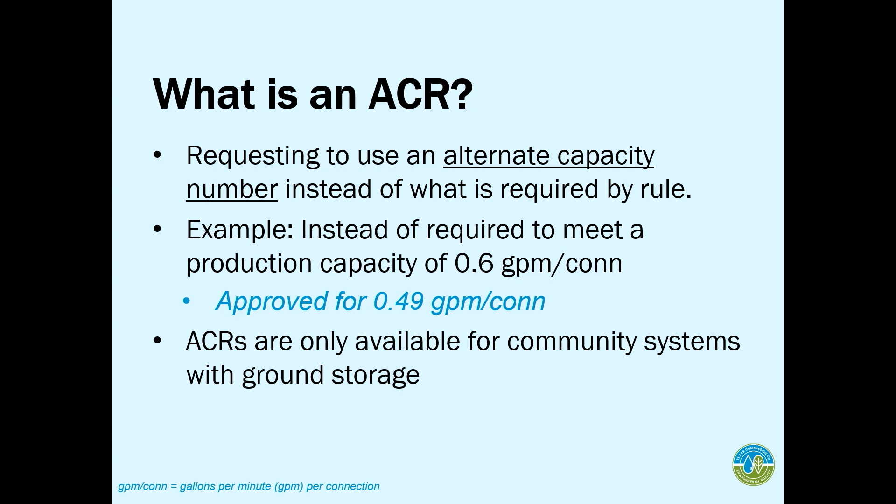As an example, let's say that you are required to meet a production capacity of 0.6 GPM per connection. The 0.6 is what's required by rule. What an ACR would do is allow you to operate at a production capacity of 0.49 GPM instead of the 0.6.

As James had briefly also touched on, ACRs are only available for community systems that have ground storage. So if you're not a community system, that's okay, we can evaluate it under a different category. But by rule, these are the only systems that are allowed to have an ACR.

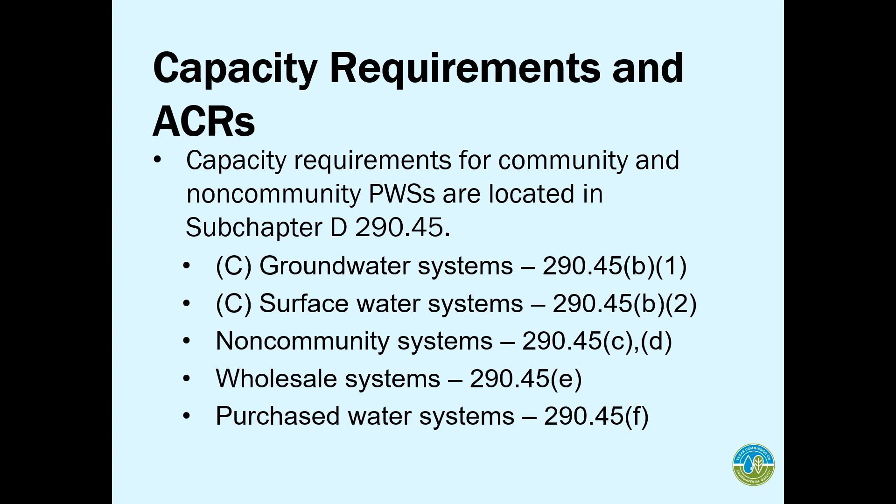These are just a quick snapshot of how the capacity requirements are broken up in our rules. We have groundwater systems, community groundwater systems under 45B1, surface water systems under B2. Non-community systems will be under 45C and D, for transient and non-transient systems. We also have capacity requirements if you're a wholesale system, under 45E. And if you're just a purchased water system, your capacity requirements will be under 45F.

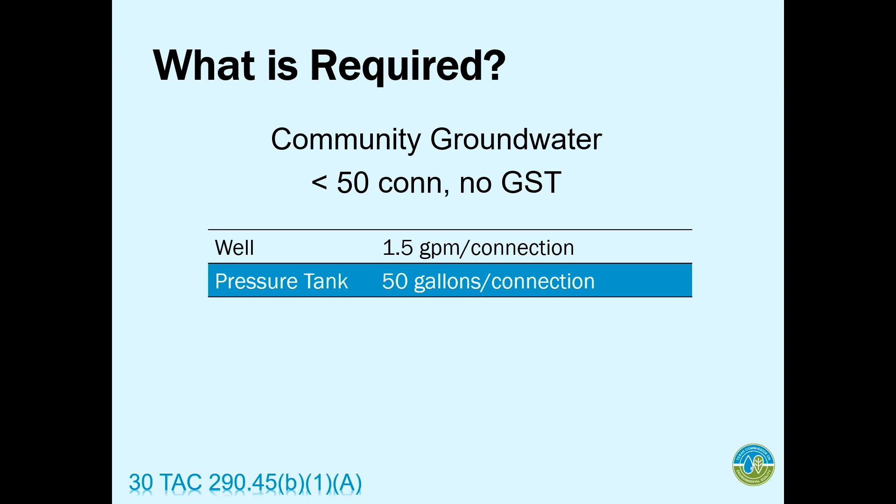So we're just going to go through these really quickly. For a community groundwater system serving less than 50 connections, with no ground storage, just a well, pump, and maybe a pressure tank, you're required to meet a well production capacity of 1.5 GPM per connection, and you also need to have a pressure tank that meets 50 gallons per connection.

So what this means is if you have, say, 20 connections and you have to meet 50 gallons per connection, that's 50 times 20 -- 1,000? Did I get that right? Maybe -- that's how many gallons of pressure tank capacity you would need.

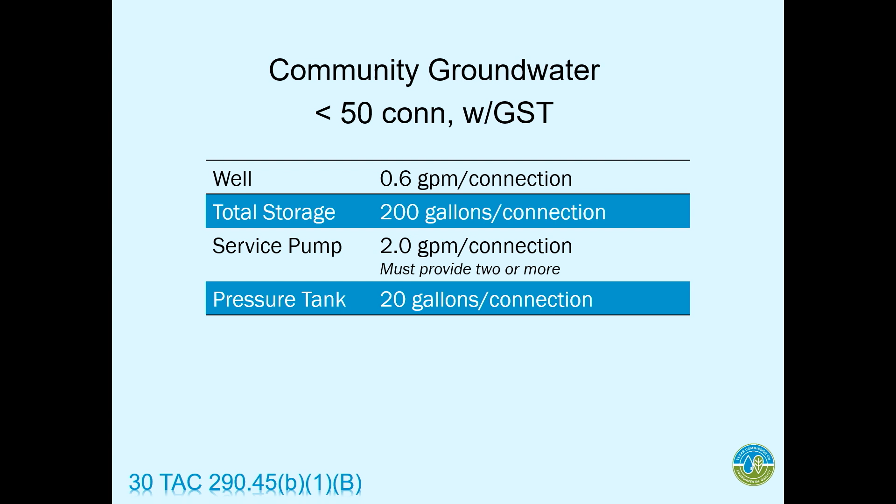If you serve less than 50 connections but you do have ground storage, then you level up and need to provide service pumps and total storage. Your well production capacity goes down from 1.5 to 0.6 because now you're providing storage and have water available -- you're not running your pump all the time. Your total storage capacity is 200 gallons per connection, and you have to provide at least two or more pumps for service pump capacity, with both pumps together meeting the 2.0. Your pressure tank capacity goes down from 50 to 20 gallons per connection.

For our larger community systems, serving 250 or more connections, you'll see that you're required to have a little bit more for redundancy, to ensure you have sufficient supply. At this point, you would need to provide 2 wells, and both wells combined need to meet the 0.6.

You need to have a total storage capacity of 200 gallons per connection. Your service pump capacity can either provide 2 or more pumps, 2.0 GPM per connection, or you can have at least 1,000 GPM and still meet peak hour demand with the largest pump out of service. So that's like an and/or. Pressure tanks, 20 gallons per connection.

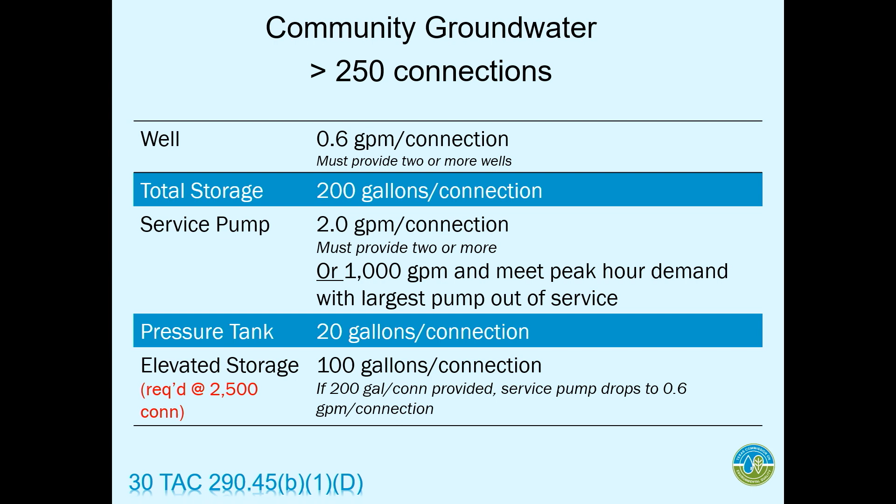But as James mentioned also, once you hit 2,500 connections, you need to start putting in elevated storage, and that's what the rule requires. You're only allowed to have up to 30,000 gallons of pressure tank capacity for up to 2,500 people, and you can't meet the capacity requirements with that.

You need to start going into elevated storage. And one of the ACRs I'll talk about is when you can't put in elevated storage, but let's say you want to increase your pressure tank capacity. That's one of the ACRs that we do review. I'll go into more detail on that.

Groundwater systems, guess what? If you are a mobile home park or an apartment, you have your own regulation, your own capacities. Your well production is going to be greater. If you're classified as a mobile home park or an apartment, you have to provide 1 GPM per connection, and you have to provide pressure tank capacity, 50 gallons per connection.

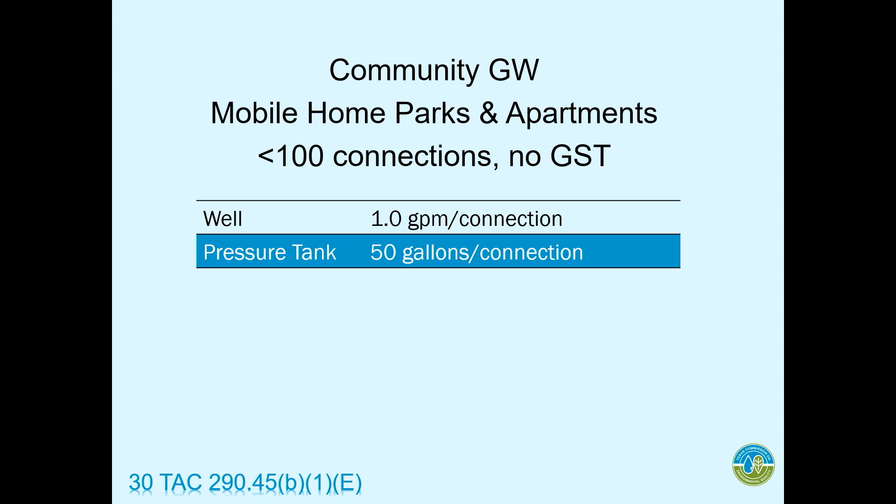Typically, these systems, if they don't have ground storage and less than 100 connections, you can get through with this. Once you put in storage, or you begin serving more than 100 people, then you start getting more capacity requirements. Your well capacity requirement will stay at 0.6, but if you have more than 250 connections, you have to have an emergency interconnect. Your total storage requirement goes up to 200, then you have service pumps put in, and then you have your pressure tank capacity put in.

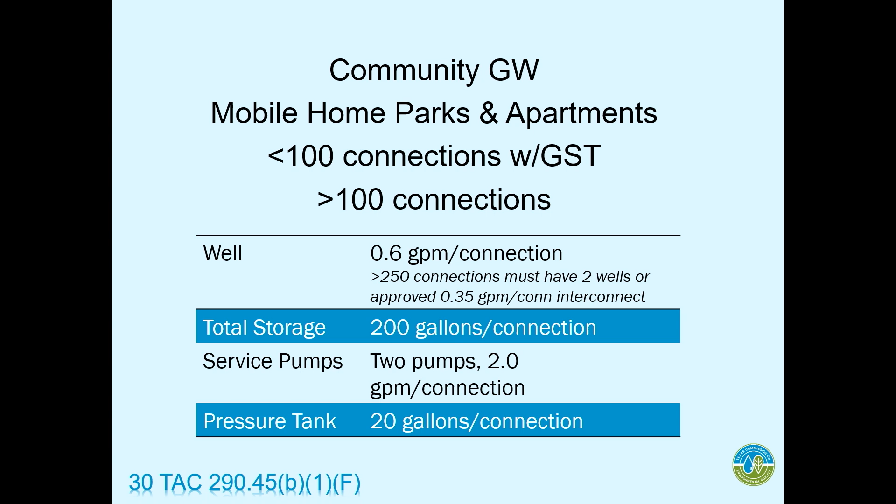So these are what's required if you operate a mobile home park or an apartment and you're serving less than 100 connections with storage, or you're already serving 100 connections.

Now, if you're wondering what a connection means for an apartment, every single living unit is considered a connection. So if an apartment building or complex serves 300 living units, 300 apartments available for rent, that is 300 connections. This is when some public water systems end up finding out they should have been counting each of these apartments as one.

So this is just something as a heads up. We're not here to get anyone in trouble, but as far as connections go for apartments, every unit is considered one connection.

And then the big kahuna, the surface water plants. These guys have a lot. They have a raw water pump capacity they have to meet, a plant capacity, transfer pump capacity, clear well storage capacity, and this is just before you even hit the entry point. This is just at the plant.

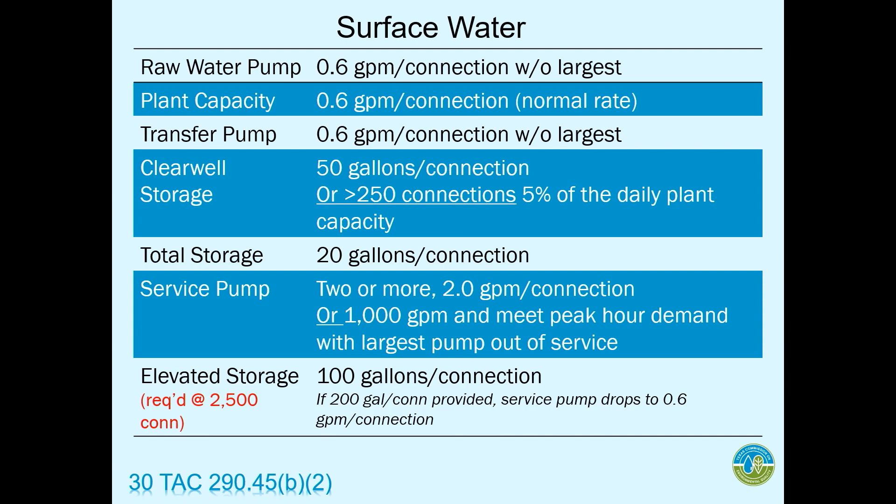And then we start looking at distribution capacities that you're required to have: total storage, service pump capacity, and then elevated storage once you hit the 2,500 connections in your system.

So essentially, for the most part, ACRs that are requested, say for a surface water plant, for plant capacity, we would need to also evaluate the ACR for raw water pump capacity. If we were to grant one ACR for one and not the other, odds are you might get cited by the region because you can't really meet one ACR without being deficient in the other.

So if there's ever an exception or an ACR being requested for surface water treatment plants, we would need to also consider raw water pump capacity along with plant capacity, and also consider what is production capacity. That's a different kind of beast to throw in there.

Needless to say, ACRs for surface water plants are a little more complicated, a little more complex, but they're achievable, as we've done them before. We just might need a little different information to make sure we issue you a number that is applicable and meets the goal of the system, but can still provide public health protection and continue to meet the demands of your users and your customers.

Purchased water systems, if you buy water, you are required to have a purchased water contract, and that contract has to have a maximum daily rate or hourly rate, basically something that tells us how much water you are obligated to receive from your wholesaler. Typically the contracts I've seen will issue an annual amount.

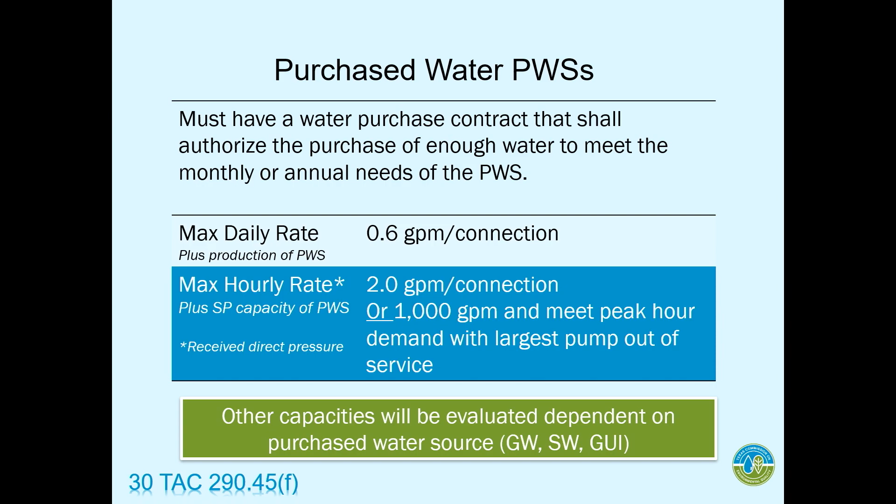Once we start talking about ground storage, pressure tanks, elevated storage, all the capacities for those other systems for your purchased water will be evaluated depending on the source. Are you a surface water purchase? Are you a groundwater purchase? Are you a GUI purchase? Depending on that source, it will tell you what type of storage capacity you need to meet, whether elevated storage capacity or pressure tank capacities.

But for the most part, for ACRs that deal with purchased water capacities, it's because there's a contract issue, or a system is stuck at a take-or-pay situation, paying for way too much water that the system doesn't need, but can't reduce it because the state requires a certain number. This is when you can come to us with usage data and we can try to grant a number that's more representative of usage, helping alleviate contract negotiations, or at least bring you into compliance with your existing contract because you just got an ACR.

As we mentioned before, if you are a community system with storage, you qualify for an ACR. If you're not, if you're a non-community system or one of these tiny groundwater systems with no storage, then you can apply for a capacity exception. There's a reason why these two are different.

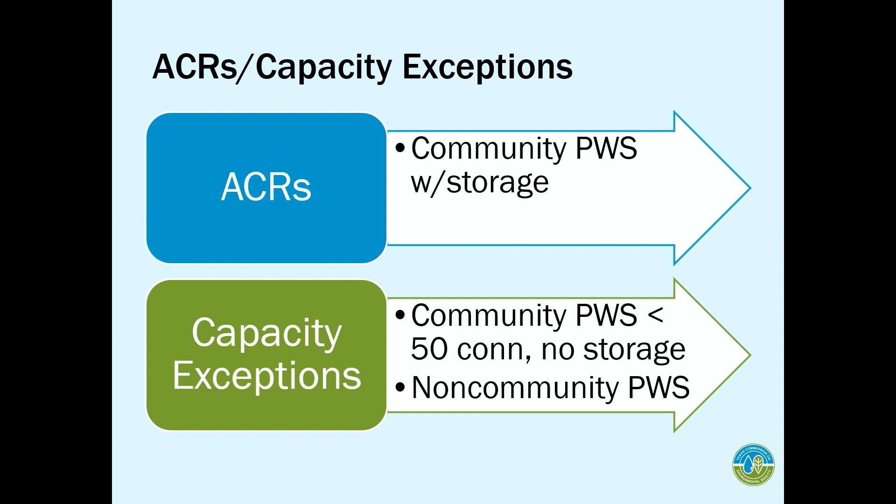ACRs are rule-based. Our rules specify what you need to provide, what your engineer needs to submit, how long the review period is, and if there's a denial, the rule says what we need to do. The timeline is different too — it's a rule-based 90-day review period. If you read our regulations, if you don't get a response from the executive director within 90 days, you are granted what you requested. So that is no budging — a 90-day review period can't budge.

But under a capacity exception, we have a little more leeway, a little more flexibility on the information we need to review, and so we might have more flexibility with the type of conditions we issue. So if you're in a situation where you got a violation for some capacity and don't qualify for an ACR, you can still request to get that capacity number reduced through the exceptions process.

So some of the reasons why systems request ACRs: they got cited. Guess what, you are serving way too many connections, and now your well capacity or well production is not enough. So you'll come in and ask us to reduce your well production capacity requirement.

You're a purchased water system or a wholesaler and there are contract negotiations, or it's time to renew your contract, or you're getting pressure from water conservation efforts to reduce your consumption. You don't want to get in trouble with the state either. This is where you come in and we can review a request to reduce the capacity you need to provide, but it's going to be based on water usage of your system.

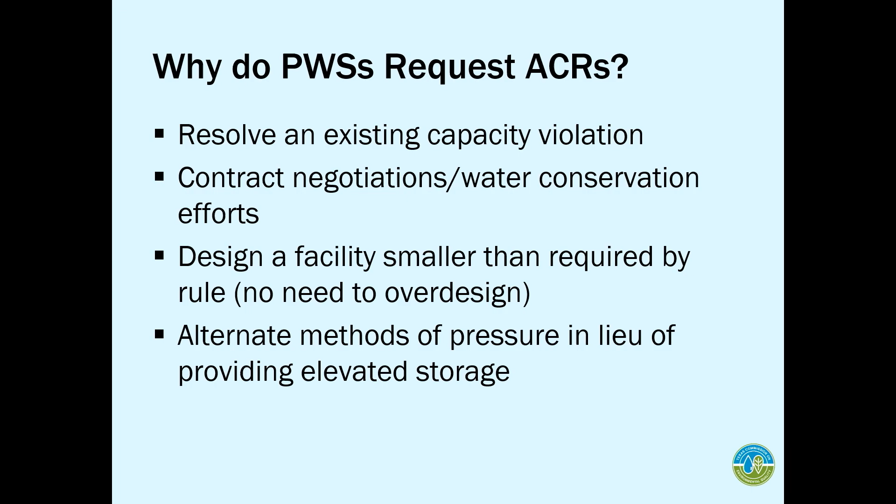We're required to because we now serve 2,500 connections, but we don't have the money, we don't have the space, or we're out in flatland country and there is no way we can do this.

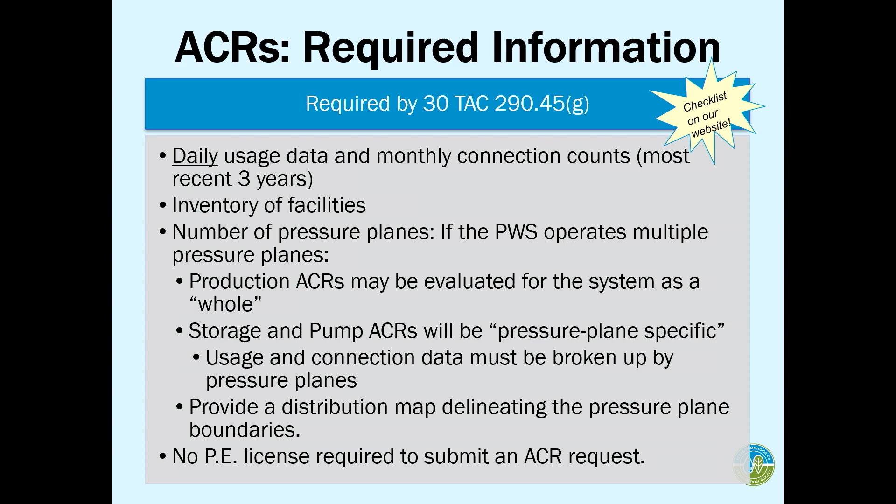And the last thing is you don't need to be an engineer to send us an ACR. Your operator, your secretary, anybody - your operator probably knows the system more than an engineer that lives in Houston, but you can send us an ACR request. You just need to give us usage data and connection counts for the last 3 years, and then what we have here on the list.

We do have a checklist on our website, and I can show you where you can find that after the presentation. Go and click it, download it, and you basically have this information ready for you. As I mentioned, the review period is 90 days, rule-based 90 days.

If you're a purchased water system that is going to request an ACR, like say for production, give us a copy of your contract so that we can establish what would be the production capacity you're supplying, and we'll run that with the region just to make sure we're all using the same number.

There have been some situations where there is no historic usage data. There was a fire, or someone left the job and they were really upset and they took everything with them. We've heard this. There is a route for a system to request an ACR, and they can use someone else's data to get lower numbers.

This type of submittal is what we call a comparable site ACR. So say that you're an RV park, you want an ACR or an exception, but you don't have any data. But you know an RV park just 5 miles down the road that's a PWS and they're required to take daily readings, and they mimic your system. They are serving about the same number of connections, same source. There's a couple of factors there that you would need to meet for the system to be issued comparable.

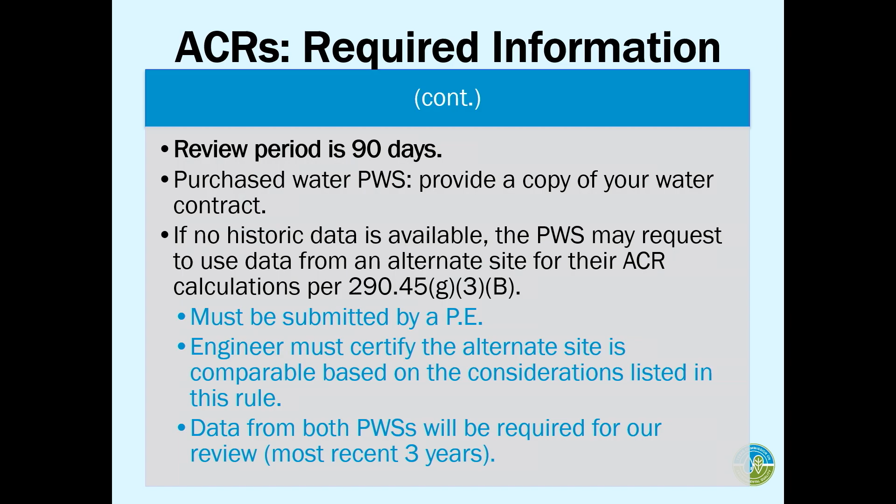So we will look at data from both sites. We will trust, but we will verify. Are these two sites comparable? Can we use the data? The last thing we want to do is issue an ACR and you find out that the comparable site uses more water than you do. You end up with the bigger number that you need. But it is possible for an ACR to be substantiated using someone else's data. But an engineer will need to submit that.

Okay, so let's say you made it to the finish line. You got an ACR. What do you have to do now? We get this question a lot. Simple, meet the number we gave you.

If we grant you an ACR for production of 0.49 and you can't meet the 0.49, odds are we're going to take that away. There are stipulations in our rules for ACRs that will mention that if you are unable to provide the capacity that we gave you, then we do have the authority to review an ACR, or region does, to go, they can't meet it. What can they do now? So you have to meet the conditions of the granted ACR.

You have to keep collecting daily usage data. ACRs are dependent on the max day demand, the amount of water that was used on a single day. And you can only find that out if you're taking data daily. So this is why we encourage you, keep taking your daily usage data if you're required. In the event region's not happy with you, or they think this ACR isn't applicable, can you run the numbers and find out for us? You'll have the daily data ready for us to review.

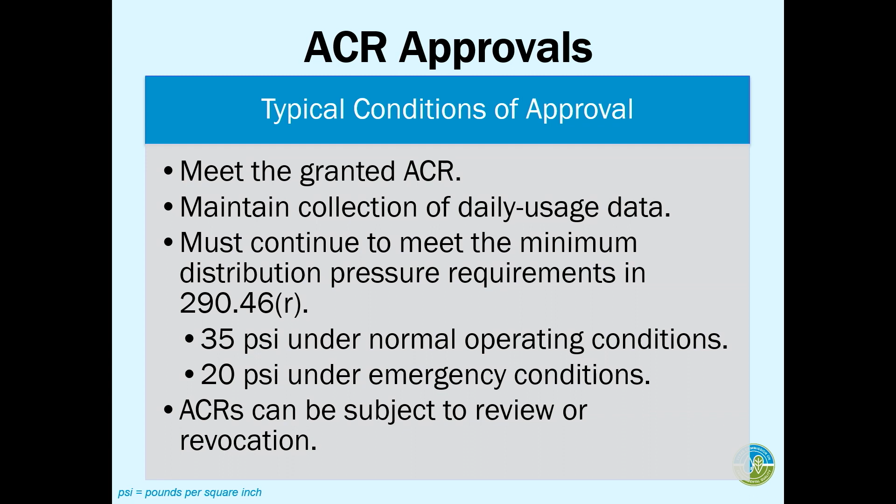And we do have a little disclaimer in the rules that say this is when we can revoke your ACR, or this is when we can revise it. So ACRs can always be subject to review or revocation. And we see this a lot where a system has an ACR from 2002, and region asks, is this still valid? So just make sure you keep your daily usage data on hand, because if you can tell them, hey, this ACR still applies and here's our data, you should be good.

This is the one ACR that's probably the hardest to get. This is where you're requesting to say, I need to put in an elevated tank and I don't want to, I can't, there's no rule, there's no room.

So what ends up happening is you are requesting to use an alternate method of pressurization. What are you going to use instead of elevated storage to provide pressurization during an emergency or a power outage? That's what we rely on elevated storage for when you have more than 2,500 connections. So what are you going to do instead of that?

We do go through a very rigorous review process. A PE has to submit this type of request. They are going to have to provide modeling data. They're going to have to calibrate their hydraulic model and show us they did that. They might need to run field tests to make sure they're using a correct coefficient friction factor for their hydraulic models. It has to be submitted by a PE. This type of hydraulic analysis, it would take me a couple years to figure out how to do that.

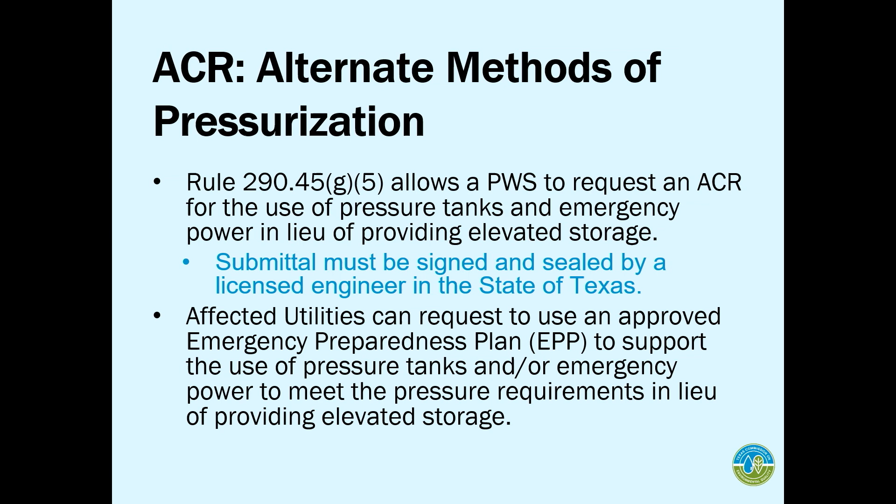There's also affected utilities. How many folks here now need to have an EPP? A lot of you, everybody pretty much. The old water code rule for the old EPP counties said that if you had an approved EPP, you could use that instead of having to put in elevated storage. We're basically looking at the same thing. We're going to be looking at hydraulic models to make sure that without elevated storage, you can still provide sufficient water under sufficient pressure under all scenarios.

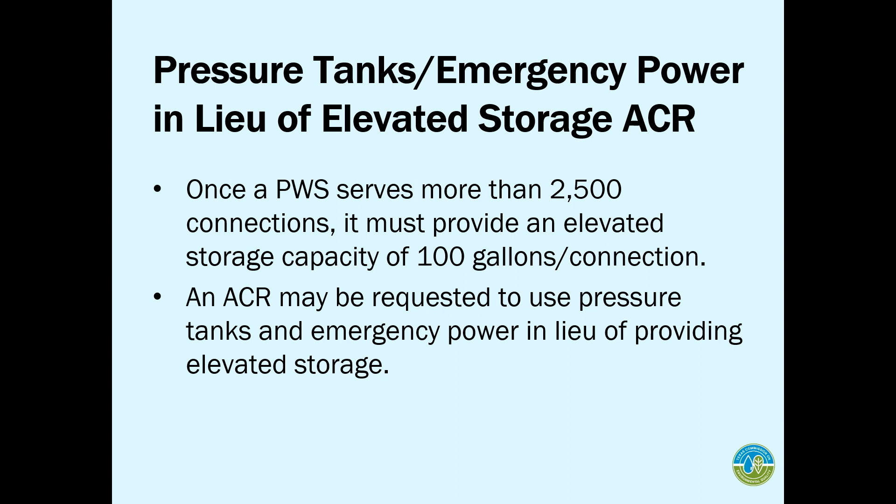Let me skip this because you all know what this is. Once you hit 2,500 connections, you have to provide elevated storage. You can request to use pressure tanks and emergency power instead of elevated storage.

So this is what we will need. We'll need everything we need for an ACR review: 3 years of daily data, inventory of facilities, your purchase water system, then send us a copy of your contract. And then here's the hard part, the extra part that needs to be done by a PE.

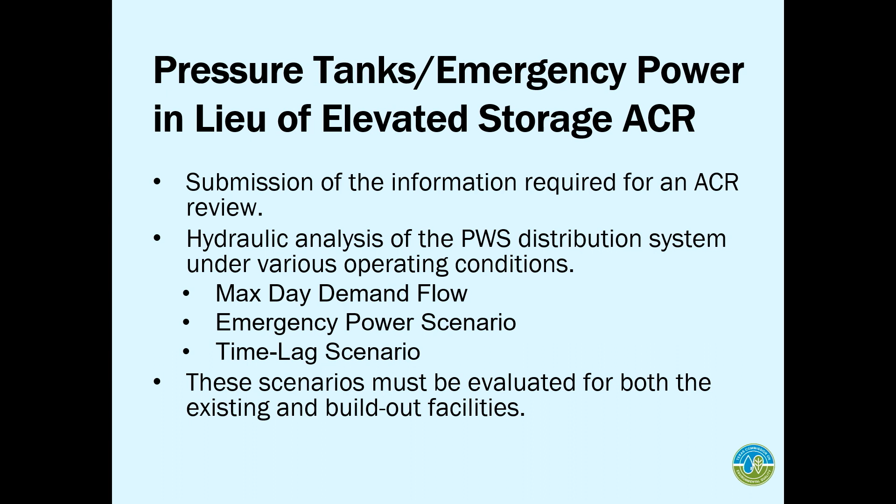You have to verify with us with hydraulic analysis that the system without elevated storage, and with the emergency power and pressure tanks you're proposing to put in, can still meet demand and pressure under 3 scenarios: what's called a max day scenario, an emergency power scenario, and the third is called a time lag scenario.

So these 3 modeling scenarios have to be evaluated for the system as it stands today, and also how the build out of the system, like these facilities will be able to provide pressure for up to 4,500 connections. So you have to model it for the ultimate system as well.

Max day scenario basically means model it at a flow that's equal to your max daily demand, or 1.5 GPM per connection. Emergency power scenario is basically saying you're just running your generators, and your generators are only operating certain facilities at the plant, and that's what the model should show. If your water plant has a generator that can only power 3 out of 5 pumps, then that emergency scenario has to show only 3 pumps online during the model.

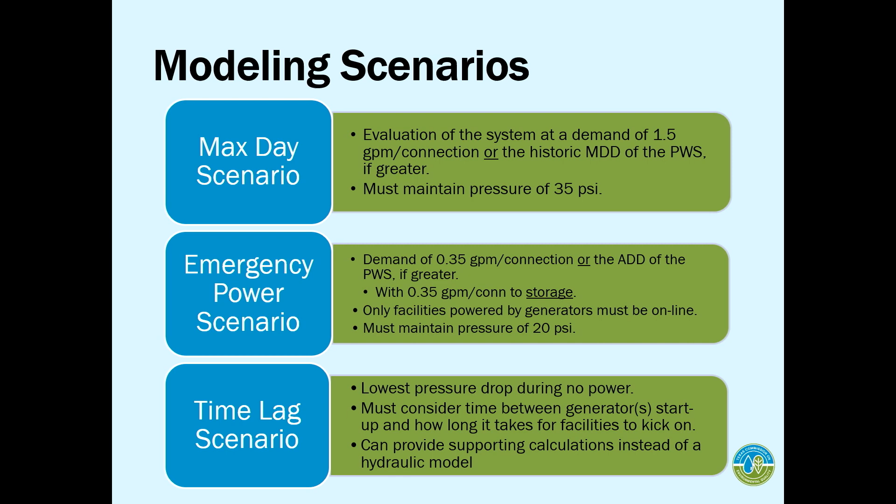A time lag scenario basically means if you have a power outage, and then that window of time until emergency power kicks on and everything that's supposed to be powered is up and running, that period where there's no power, no nothing, we need to know just how low pressure goes in your distribution system during that time. We'll need to look at it for existing and proposed connections.

Hydraulic model has to be calibrated, which means usually some sort of hydrant field testing is done. And then we will need to see a pipe network, we see what the system looks like and where the water plants are.

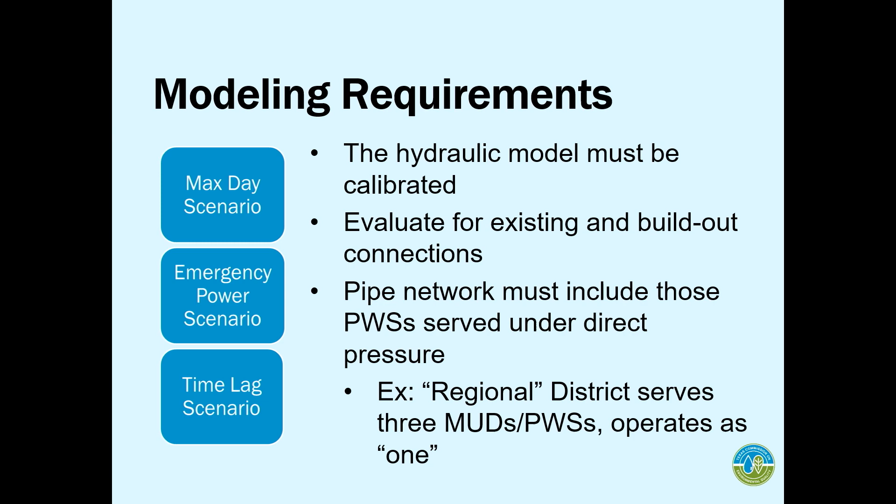If we were to grant this exception or an ACR, usually what this looks like is, okay, the system must now provide a pressure tank capacity of 24 gallons per connection for up to 5,000 connections. That's your ACR. You don't need to put in elevated storage, but you do need to meet that ACR capacity of whatever number we calculated for you.

As also mentioned, you need to have an updated emergency response plan. Your EPP, if you have one, will suffice. Emergency power, you're relying on emergency power to provide water to your customers during an outage, so we need to make sure those facilities are updated and maintained to NFPA, I believe, standard 110.

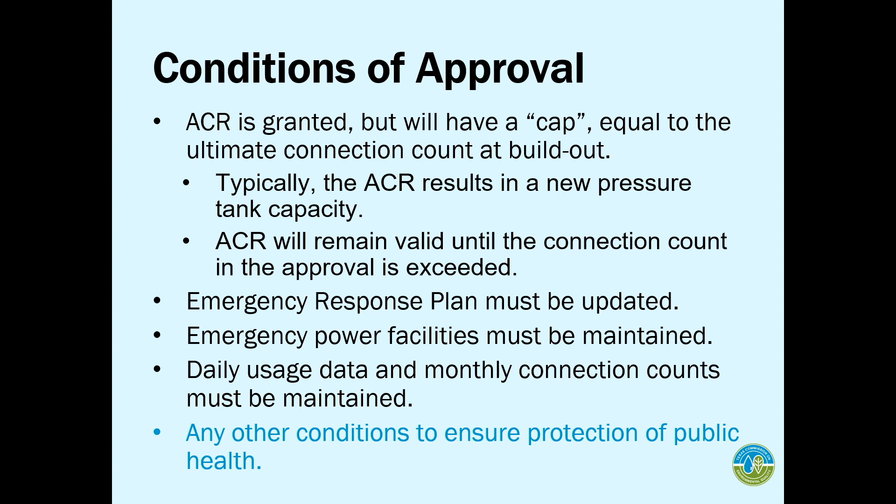Keep updating your daily usage data. Keep updating your monthly connection counts, in the event someone gets upset at the system, the state goes out there and they need us to look at it.

Here's my email address, here's our website. If you can't remember how to find our website, just Google TCEQ exception and it'll take you straight to this website. All the checklists you need for an ACR are there. A lot of the checklists that James talked about for exceptions are on our website as well.

But we'll stick around, I know y'all are ready to go to the watering hole. We're all thirsty, but we'll stick around for a few more minutes for questions if y'all have them. Thank you.

I had a question from the virtual audience. In calculating highest day demand, is there any possibility of excluding a day in history that reflected a strange confluence of events? That's one thing I did forget to mention.

Yes, the max day demand - when we look at all 3 years, we also want you to tell us were there any days with unusual demands. Was there a main break? Winter Storm Uri, did you have an overflow in one of your tanks? Did someone steal your water when they weren't supposed to be doing it? We've heard it before - Jack, I hear you laughing. It's happened.

You need to tell us which days are not representative of your system's max day. This is not a true max day - there was an emergency, we will exclude that. We don't want to base the ACR on a number that's not realistic. So please ensure to tell us, don't include the days from Winter Storm Uri - we were going nuts that day. Don't base our number off of that. Main break, construction, just let us know. We can't read minds - you've got to let us know which dates you don't want us to include in the calculation.